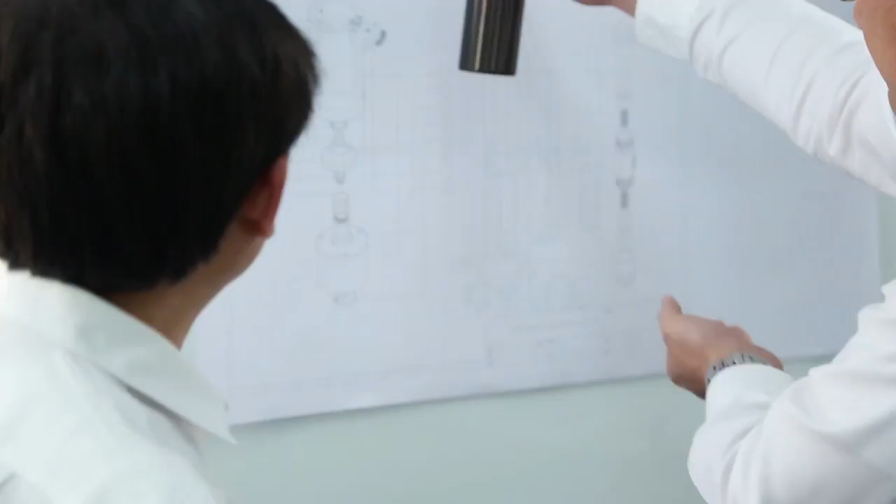Founded in 1996, AZIA Grace Enterprise Company Limited is dedicated to the research, development, and manufacturing of power tools. To adapt with the changing tides and honor its social responsibility, AZIA Grace Enterprise is changing its manufacturing policy to focus on eco-friendly product development in hopes of innovating and revolutionizing the industry.

Do you know how many spray cans are sold worldwide annually? According to industrial statistics, they figure out 10.5 billion cans. That means every single day we consume 28 million spray cans, and finally they become trash. Yes, it is a big number and a serious environmental problem.

Our motivation to invent this refiller system is to provide the total solution to this issue. With confidence, we invite you to join us.

The refillable spray can is economical and eco-friendly for versatile refilling purposes. It's easy to use and safe. The can is made of durable, quality aluminum. Except for corrosive chemicals, you can fill the can with almost any liquid.

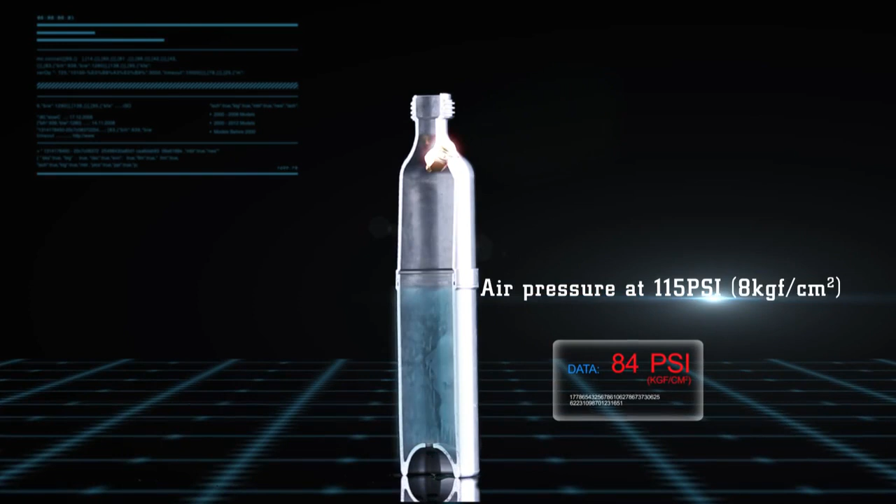As soon as the pressure level exceeds 85 to 115 psi, the air release valve will discharge overload pressure. Vaporized air is completely safe.

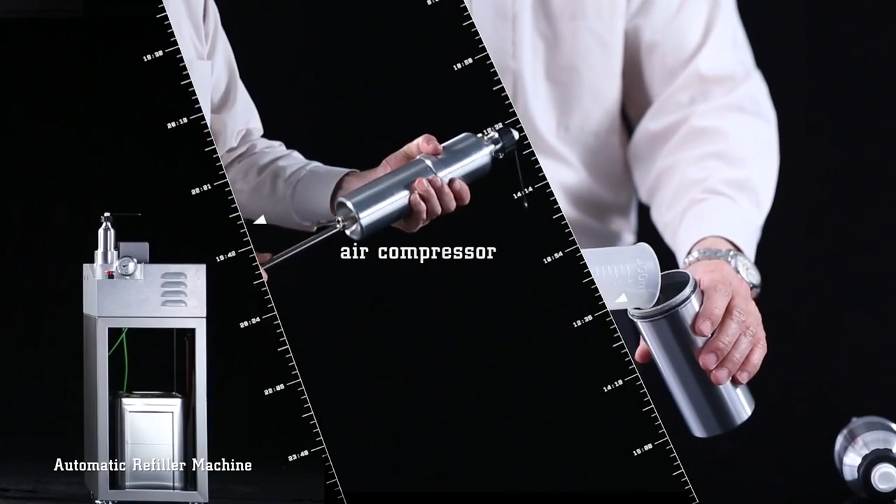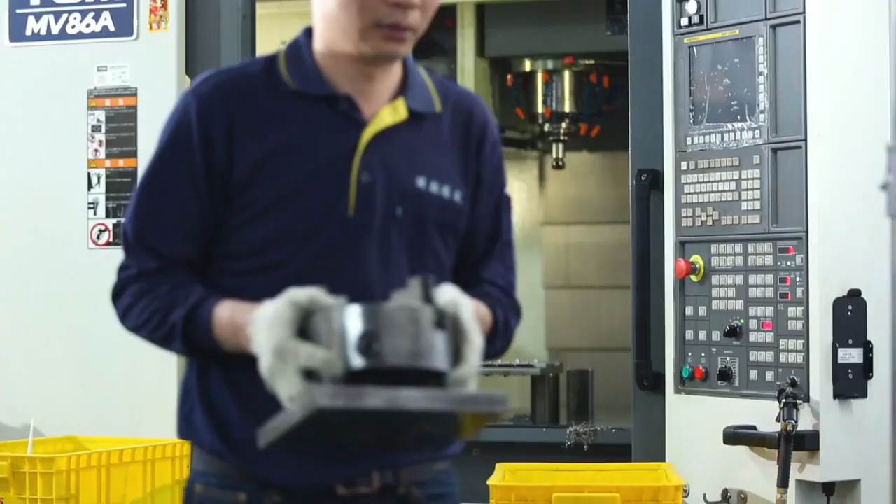AZIA Grace's refillable spray cans can accommodate many forms of refilling, including a hands-free automatic refilling machine, air compression, and hand pumping. Our spray cans take approximately 18 seconds to complete refilling, and they guarantee to significantly boost the production efficiency of your company.

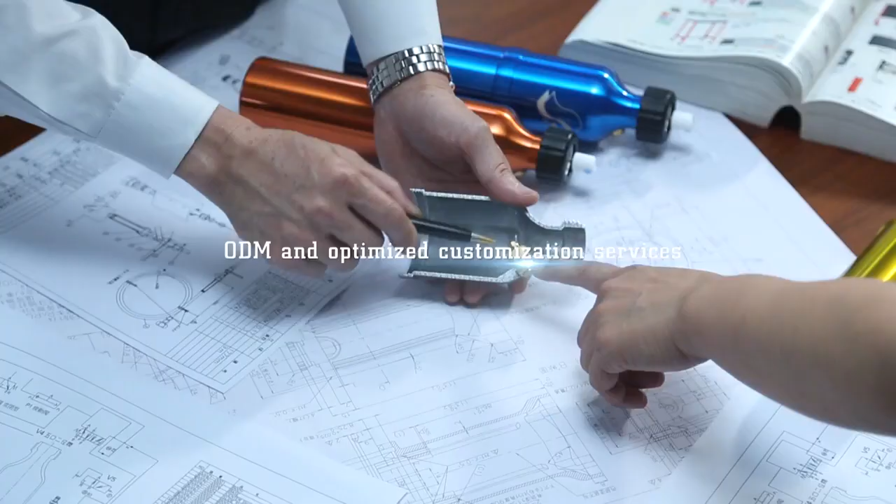AZIA Grace also offers ODM services, innovates and develops market-driven products, and optimizes customization services that combine cutting-edge technologies here in Taiwan and overseas.

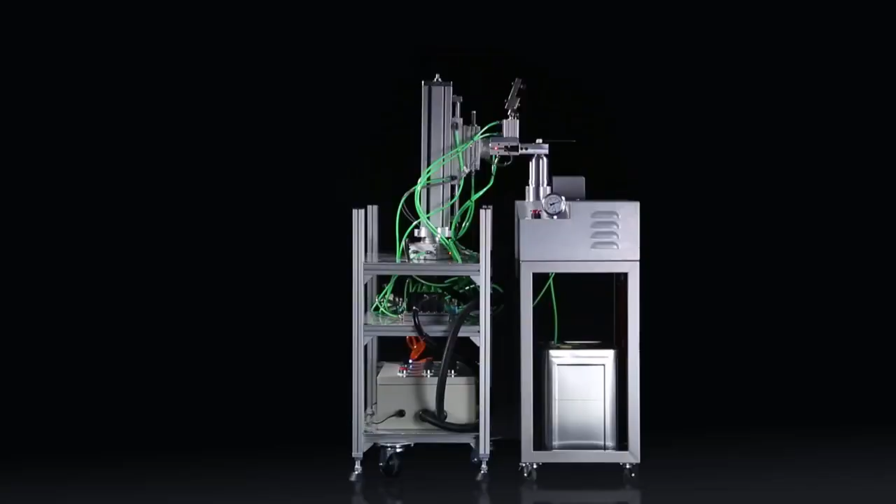AZIA Grace's top-of-the-line facilities, SOP, and efficient production provide excellent solutions for all of its customers. Quality control is executed rigorously at AZIA Grace. Products are tested for durability and use.

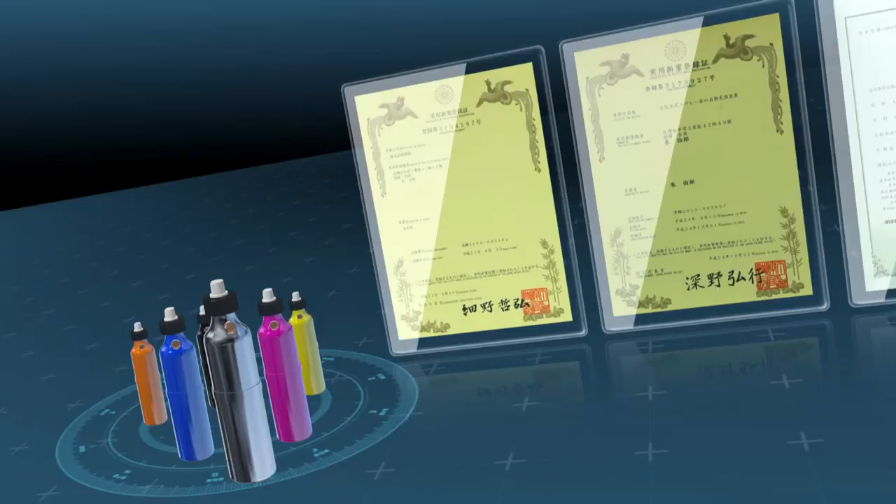AZIA Grace's refiller machines and refillable spray cans have earned patents from the US, Europe, Japan, China, and Taiwan, and have proven widely popular.

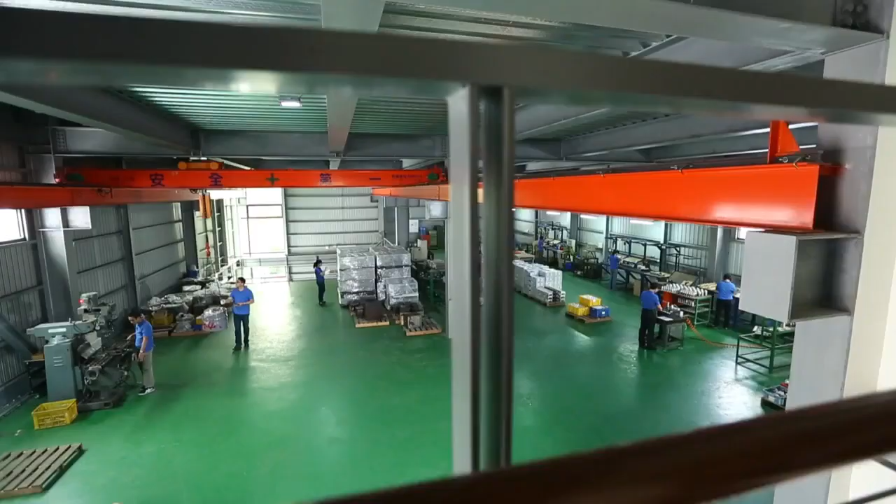AZIA Grace vows to continuously improve its technologies and quality to open up uncharted territory in Europe and North America, and expand its global horizons with innovation, professionalism, and quality green products. A guardian for a green, high-tech future. AZIA Grace.